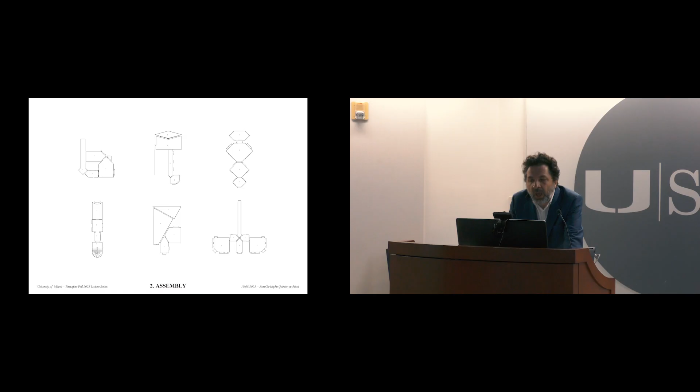The second resource is the assembly, a very important resource for me. The rooms are social beings. They seek relationship with other rooms. Every project, for me, is an opportunity to find a new way of bringing them together. In each project, I research a new specific connection between the rooms.

I'll give you an example from Bordeaux, a city in the south of my country. We had to design a social housing building on a square site, 24 meters by 24 meters. It's not easy to design a good project in this geometry.

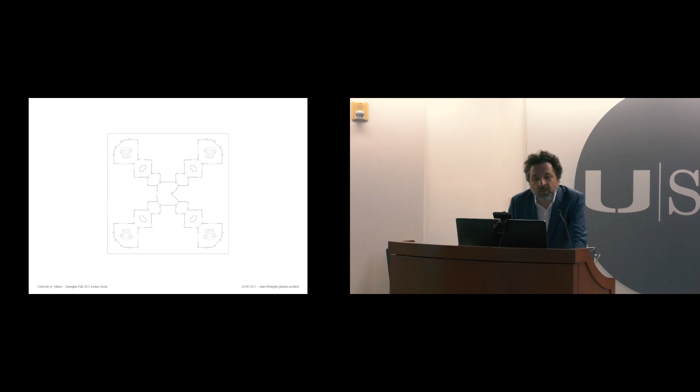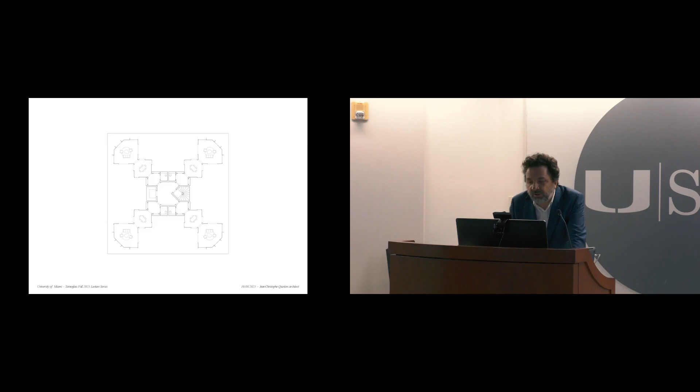So we organized the rooms around a first room in the center of the project: an entrance, a little living room, then a large living room, and a balcony, all along the same perspective. This sequence is the spatial structure of the housing. The other rooms integrate this structure: the bathroom, the bedroom, the kitchen, and another bedroom. This simple assembly created beautiful, livable spaces.

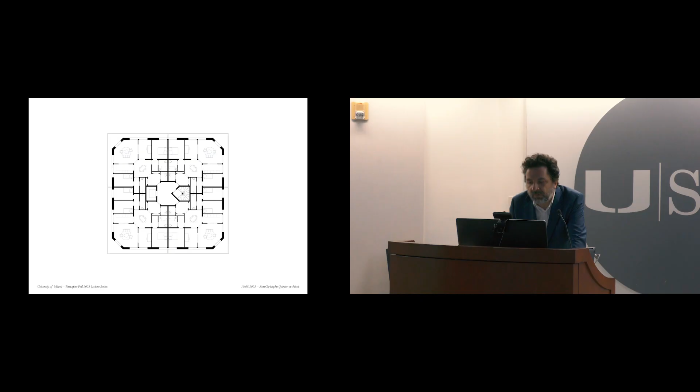The rooms, of course, and you can see the quality of the space.

This project is social housing, and for me it's very important to share with you the strategy with the structure and with the space to have a good quality. Architecture is not only a question of money, it's a question of culture, it's a question of sensibility and strategy. And it's a question of dignity too.

And the same project and this landscape. And another resource, the plan. Louis Kahn once said, the plan is a society of rooms. Every plan expresses the kind of society we want to create. Behind every plan, there's a will to make rooms live well together. That's why each plan is unique and each building has its own character.

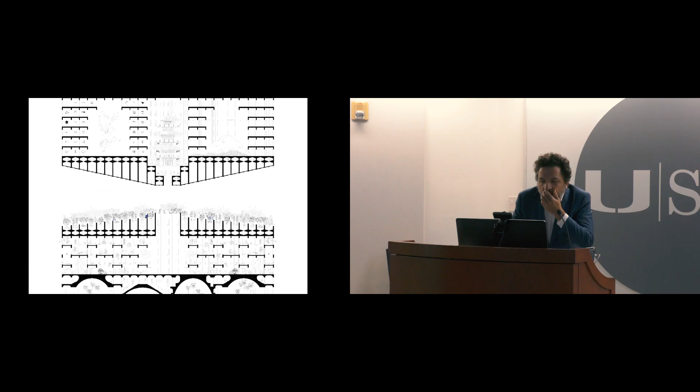Each level in this building becomes a specific world, defined by the shape of its floor and its ceiling. You can see the level of the fruit trees and the level of the pine forest, and now the level of the shared baths.

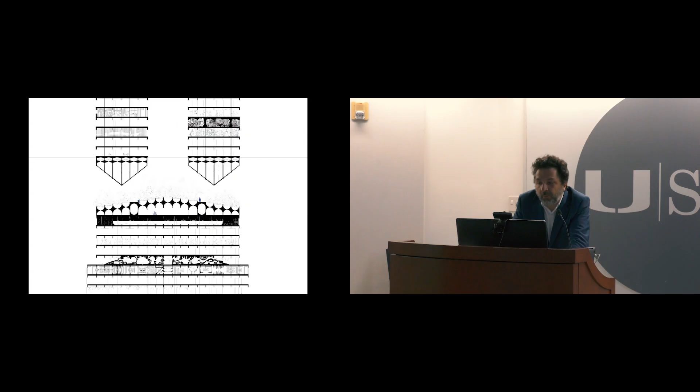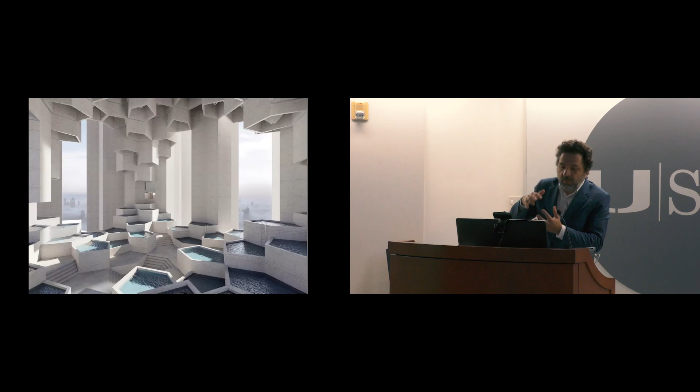It's an image of the ground floor, an image on the shared bath, and we can see, of course, the relationship between the ground and the ceiling. The pine forest, and each level is defined with its section, and now you can see the many housing levels around all the present spaces.

Another resource, the geometry. Geometry creates order, a strong, readable relationship between the different parts of a building. In Corsica, an island in the south of France, we designed a small housing cluster. It is organized around an equilateral triangle.

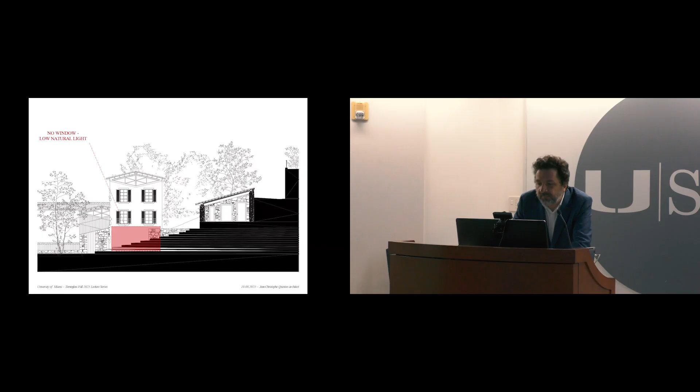And another resource, the space. Sometimes space appears when we solve a problem. A new example in Corsica, in my parents' house in the village Vico. The ground floor of this building, of this house, was dark. There was low natural light. And by cutting a little part of the first floor, we let light from the south fall into the room.

That small move completely transformed the feeling of the house and of this room. The ground level is full of sunlight. It suddenly expanded towards the light.

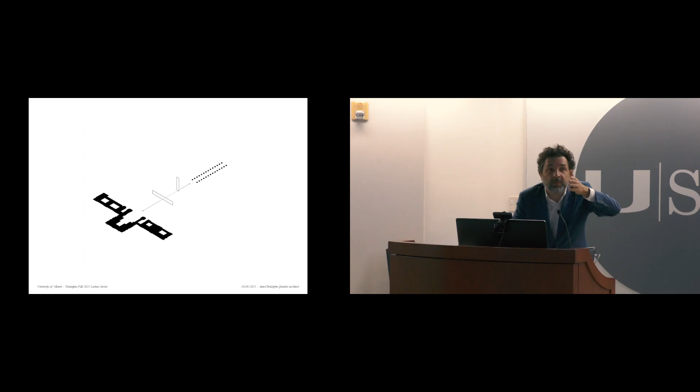And another resource, the inside and the outside. Every project, I think, must build a strong relationship with its environment. We recently built a small wooden theater facing the Château de Versailles, one of the most beautiful sites in the world. This site is particular because there are two landscapes in the same site: a horizontal landscape with the chateau and a vertical landscape with the trees of the Avenue de Paris.

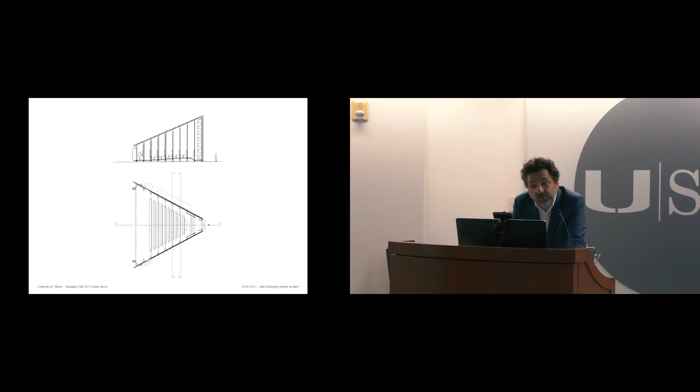And the project, as you can see, has two openings: a wide horizontal window framing the stone landscape of the chateau, and a vertical one framing the tall trees of Avenue de Paris. The plan and the section are deducted from the windows. The shape is a deduction of the landscape.

Architecture doesn't cut you off from the world. It amplifies your relationship to it. You can see the two windows inside towards the Château de Versailles, and the space is very special because the space is vertical and horizontal at the same time.

It's a strange experience. Of course, we need to think about the window blackout system and the window closing system. And just with this question, how can we design the details of windows against the wind, against the water, and against the sunlight?

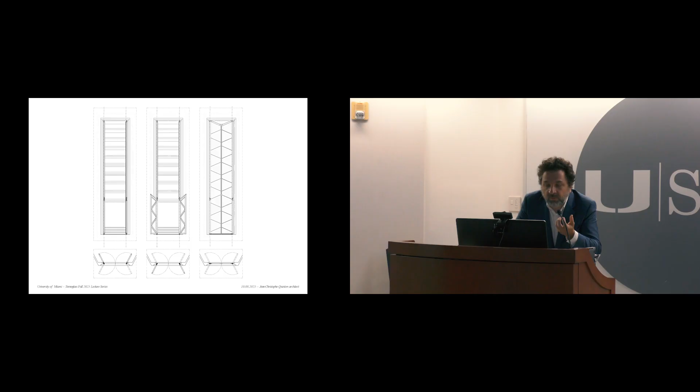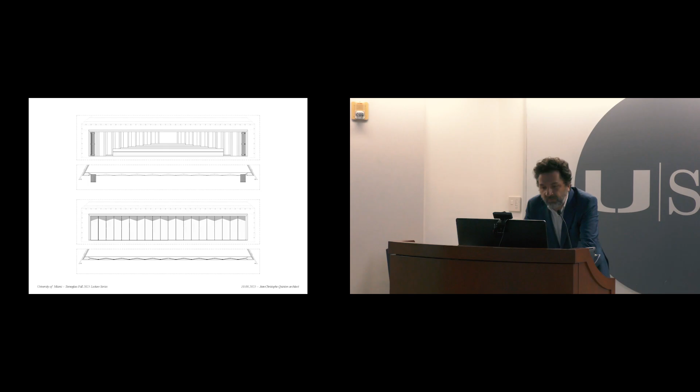Suddenly, we can design and create many shapes, many forms of opening. You can see the opening with the system against the light, with the shadows of sunlight. And now the door, and another door with the shadows. The different systems to open and close the door. As you can see, there are many possibilities of use.

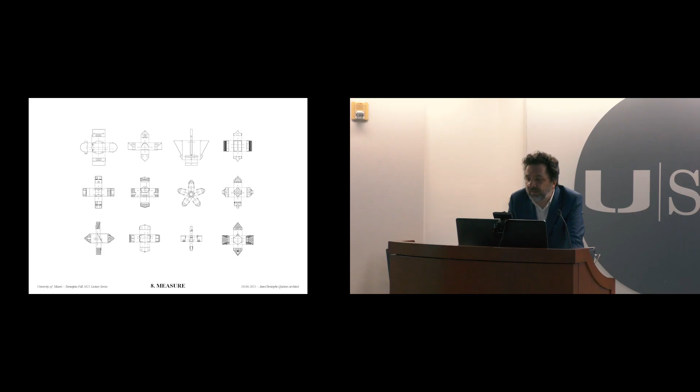Now, another resource: the measure and the human scale. Whatever the scale of a building, we must never forget the human measure. The strength of the architect is to think with all the scales without ever forgetting the human scale.

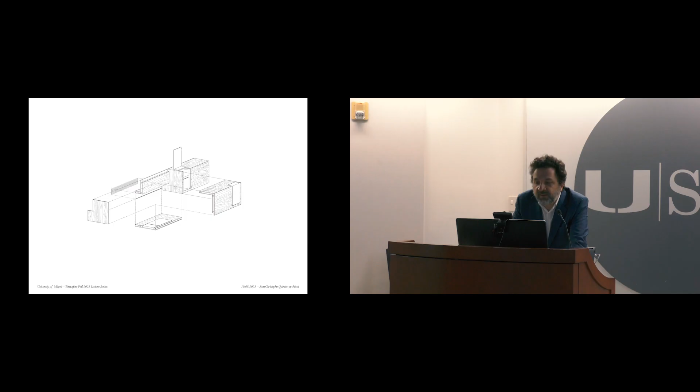We designed a mountain hut where each cell is just big enough for a body, a mattress, and a window. The cells are placed on top of each other. They are prefabricated, and as you can see in this building, the ground floor is built with local stones, and at the top there is a rainwater cistern. You can see also the bathroom, the measure of the body inside the wall, here and here.

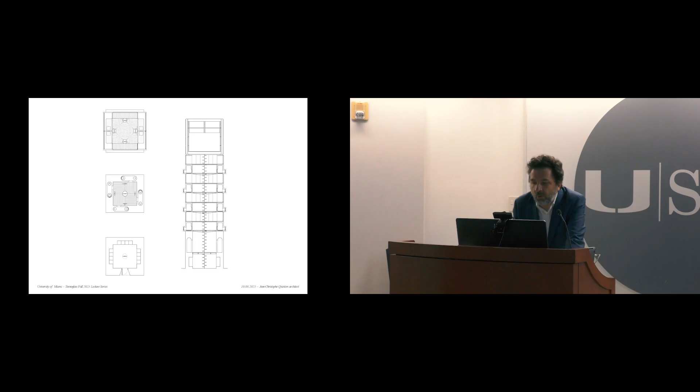When a walker arrives, he crosses different spaces. The building seems to be like a totem. You can feel the scale of the sails, the entrance. You can see also the...

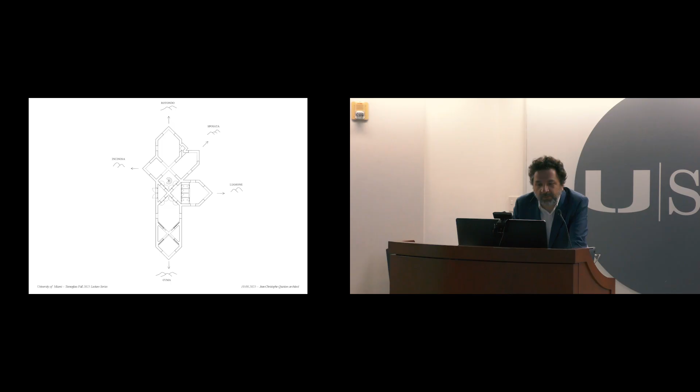Of course, in Corsica, the walls are very thick because of the heat, and the form of the roof confirms the direction of the mountain. Each part with a mountain peak. The form of this house is not a composition. It's a deduction from the site itself. Each room towards a mountain.

This form is not a composition like an artist makes. It's very precisely a deduction of the site. Each window with one mountain. You can see the structure of the roof. The Cuma, the mountain behind the house. Inside, each room with one mountain.

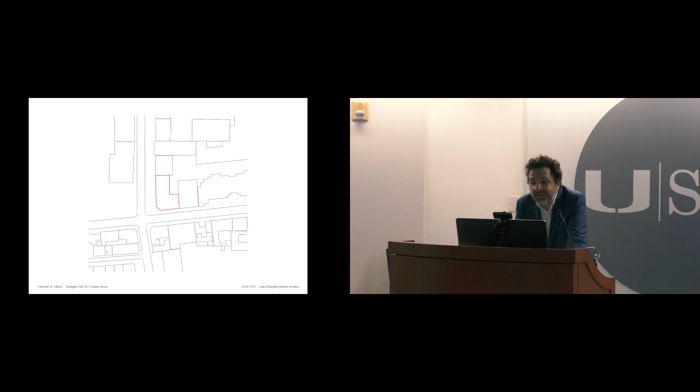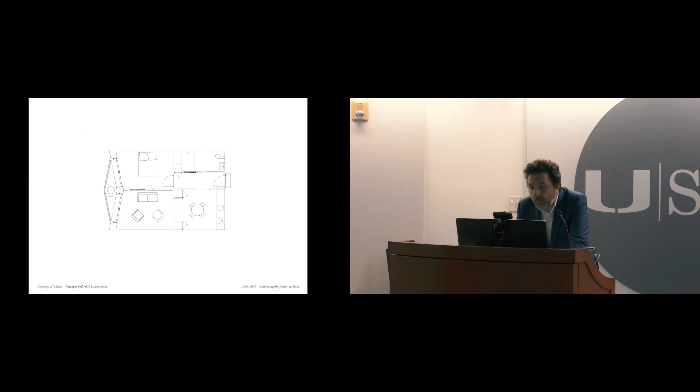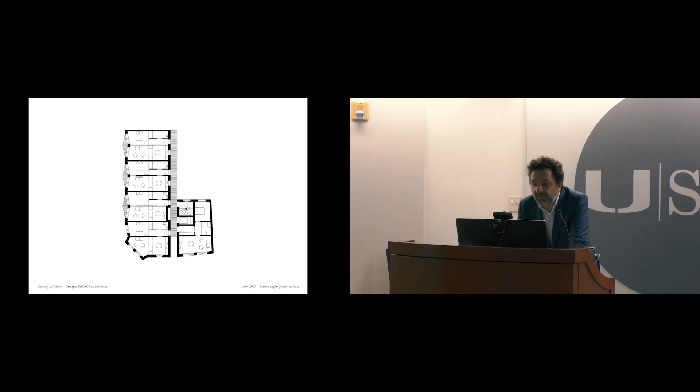In a social housing project near Paris, we wanted balconies for every apartment, but regulations limited how far we could extend towards the street. So we folded the facade inward, then outward again, creating a zigzag that formed balconies within the rule. That fold became the building's identity and gave quality to every apartment.

We are making models. Making models was very important. Without models, I think I am blind. Models say the truth. Models show you the truly architectural qualities of your ideas. And sometimes a model tells us it's not a good idea. Models show you the qualities of the object you have designed. This model doesn't show a theoretical idea. This model shows you the immediate experience of architecture.

And now the real building with this balcony, concrete balconies. You can feel the identity of the building because of this form, the quality of each apartment, and the building in the city. Some details.

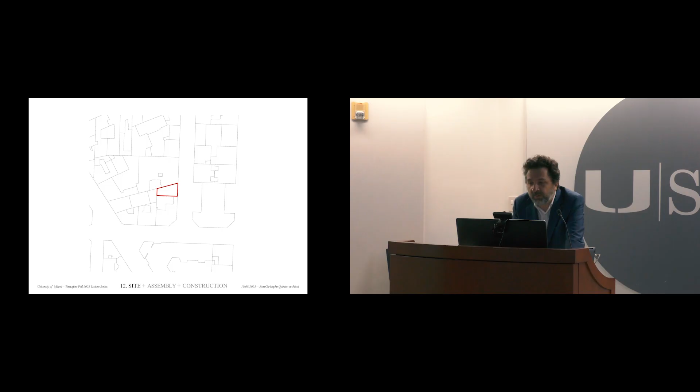In Paris, we built social housing in stone in one of the city's most elegant districts. Building in stone gave dignity to social housing and continuity to the Parisian street. The shape of this building is a deduction.

In Paris, the streets are very continuous. It's a specific identity of Paris. I think housing in Paris has to respect this urban fact. But it's not easy in this case because the buildings around the parcel are not in the same plane.

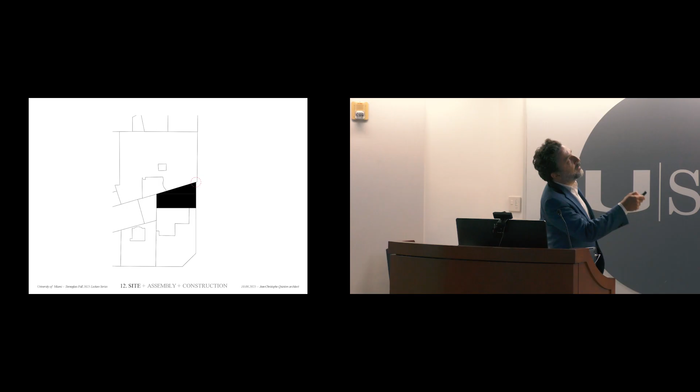This building, this facade, and this facade are not in the same plane. It's not an easy question. So we are looking for a solution. Like that is not a good solution. Like that is not a good solution.

But we had an intuition with the curve. With the curve, each facade seems to be in the same plane. And we know that there are 3 rooms in this facade. So 3 rooms, so 3 curves.

Then we should have a good assembly of rooms. The stair, the entrance, and the room, and around the other rooms. At the top of the building, a large living room, and the other rooms.

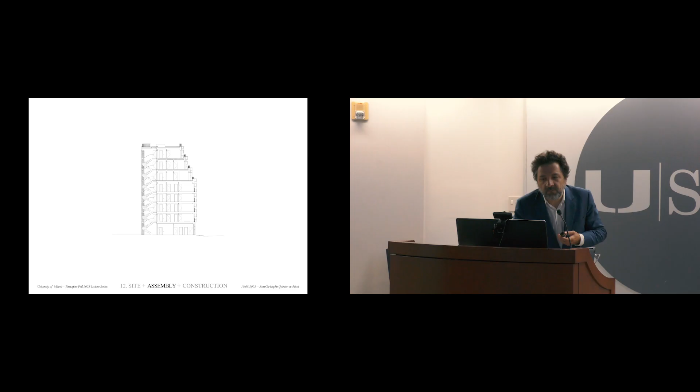And the materiality and the form of the building with the stones. Each stone of the facade is precisely drawn. And with digital tools, we carved each block with minimal waste, combining old material with modern precision.

You can see a specific stone. The name is cul de lampe in French. The geometry is a specific geometry. You like this stone here? Between the first level, the ground level, and the first level.

And you see the building in the street. You can't imagine that this facade and this facade are not in the same plane. It's a Parisian street. It is Paris.

From far, the building disappears into the street. But close, the building has its personality.

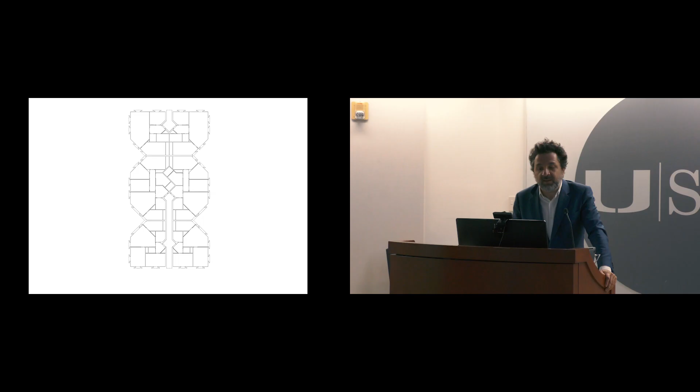It depends. I'll give you another example from the question of housing and the assembly. We were in Paris, and in this building, the assembly is with pentagonal rooms, and with this shape of rooms we can create the domestic section in this building. Sometimes the first thing is the assembly and the room, the relationship between the rooms. Sometimes it's the site. Sometimes it's another resource that we use. In each project, we use one of these twelve resources. So we don't know at the beginning which resources we use. Is it clear?

We have another question over here.

Thank you for a beautiful lecture. It's a nice marriage of science, math, formulas with a consideration to the natural environment. We see a theme of light that you bring to all your projects. Other than light, what is another consideration that you see in all your projects?